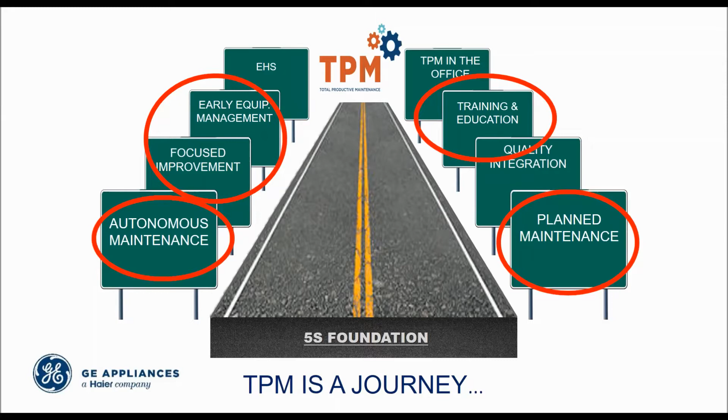And then obviously 5S. 5S is very important. 5S helps with your safety. 5S, you really can't do autonomous maintenance, and planned maintenance is less efficient if you don't have a good 5S foundation.

Okay, so why did we need to go into reliability? Well, we had new ownership, and Haier is a Chinese company. So they gave us a little leeway for the first year, and then the second year, there were some strict KPIs put on us. And so we really needed to get to reliability so that our equipment was more stable.

We have increased competition. Okay, increased competition. There are competitors in Tennessee, competitors in South Carolina, competitors in Ohio. And so we really needed to improve, once again, the stability of our equipment so that we could get our products out the door. We have increased capacity needs. Our sales are just going through the roof. And so we really needed to improve our manufacturing capacity.

All of you probably are having the same problem. Our labor pool is shrinking. We have our older employees retiring, and we are having a difficult time finding the skilled labor that we need to work on the assembly lines in the manufacturing plant. So actually what we've done, we just rolled out a huge workforce development, had a press conference yesterday on partnering with the city of Louisville, with the schools to help with that labor pool.

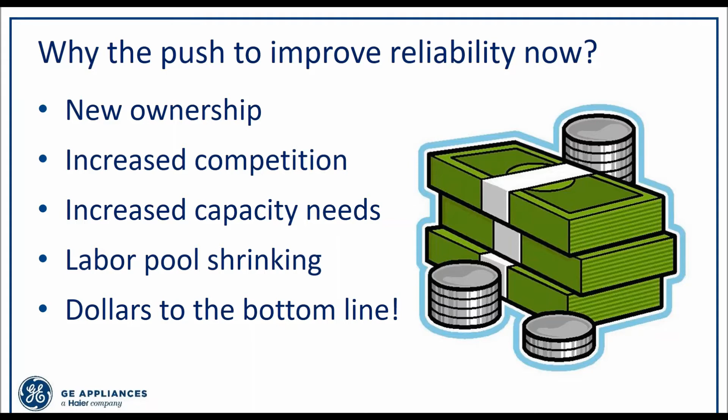And then obviously we want dollars to the bottom line. We're here to make money, if you will. We've all heard different quotes about what insanity is, doing the same thing and thinking you're going to get different results. Well, I found this online. If you change nothing, nothing changes. And so the first thing that we had to do is we had to go in and we had to change the way we were doing business.

Now, in order to do that, you have to be very aware of personal feelings of employees. You can't come in there and say, well, you're doing this all wrong, so you have to do it this way. So what we had to do is we had to get some data. We had to show people that there are better ways of doing things. And what's in it for them? Why do they want to follow these changes that we're going to ask them to participate in?

And so we really started almost like a marketing campaign with data and helping them understand what was in it for them to do this. Okay? Cherney and I were talking about this earlier in the week. I did this presentation and used this slide a year ago.

And the first part of this slide, we are reactive. I didn't have "but getting better" on that slide a year ago. So we are still reactive, but we are improving because of the reliability strategies that we have implemented here at GE Appliances. Okay? Number one, we've decreased safety risks in our plants. That's one of the most important pillars in TPM. And if you're implementing TPM and safety isn't your most important pillar, there's a problem. Okay? Because you want your employees going home the same way that they came into work.

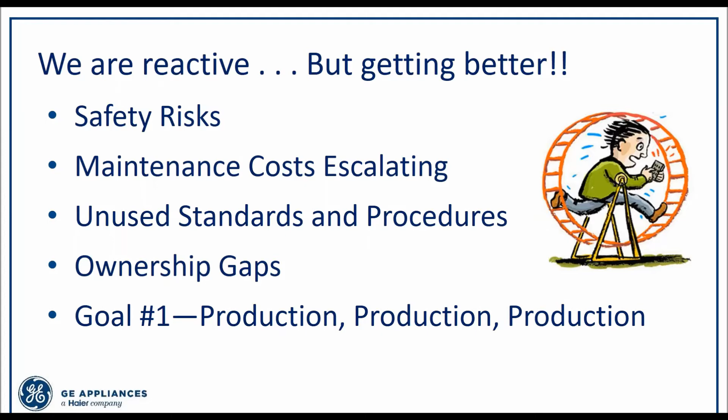And then I'm sure all of you in manufacturing have this same problem. The goal, production, production, production, is the most important. So what does that do? Well, that means your maintenance guys can't get in and do their PMs. That means that if you break down, my guys, you better get it back up because we got to produce. You can't shut down your equipment to restore it or have the operators inspect it. So we really had to change the thought process of our operations team to realize that reliability and TPM can be a partner with this goal, production, production, production. Okay, so I'm pleased as I can be that I can put in, we're getting better, and we really are.

So what did we decide to do? We picked the low-hanging fruit. And one of the things that I know from my previous lifetime at Nissan and at ArcelorMittal Steel, lubrication is a low-hanging fruit. And it actually is the lifeblood of the equipment. And people really don't have the understanding about lubrication. And so this is where I decided that I was going to focus. And I will tell you, it was a learning experience for our plants.

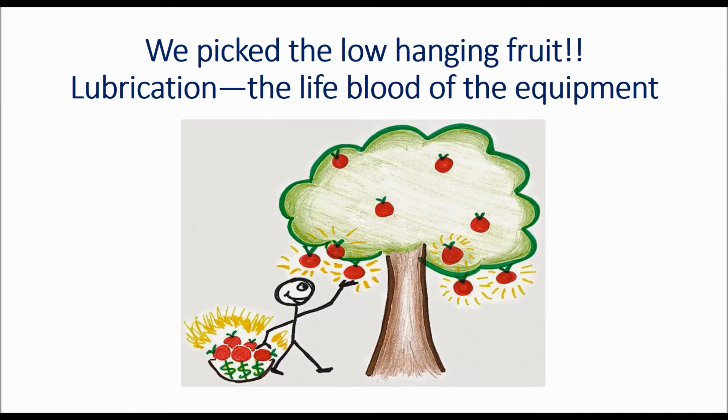And we are doing very well now. Remember, I've only been here 2.5 years. We started our journey in lubrication in the end of December 2016. And I'm going to show you some results that I think will be very helpful to you. While I will say this, it's not the easiest thing in the world to do, but there is low-hanging fruit.

Okay, so I'd love to poll you on this, but I'm sure you can think, here's what most of us are up against. Oil is oil and grease is grease. And it really doesn't matter. Oil, who cares what kind of oil we put into the equipment? And also, we couldn't find the blue grease, so we used the red grease instead. Or when we're greasing, once it comes out of the bearings, boy, we know, okay, we've got enough grease. Okay? So we really had to shift and change culture by understanding that oil is not just oil and grease is not just grease. Okay, and so that was a huge learning curve for all of us here at GE Appliances.

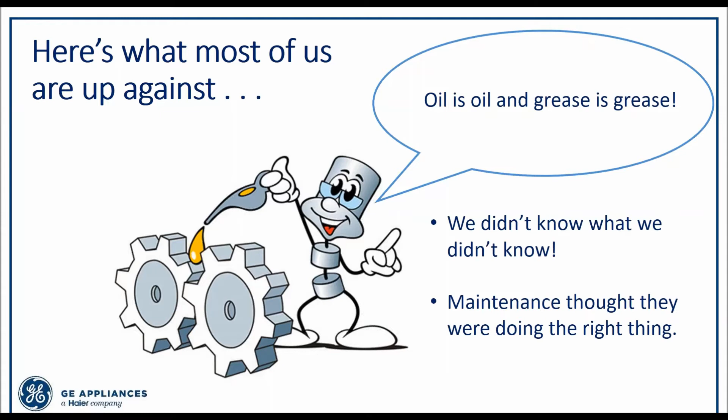Okay. Whoops. Okay, we have another poll question. So the question is, sorry, I can't see my screen, what category of precision lubrication assessment do you think GE Appliances scored the lowest in? So they actually had a company come out and do this assessment. And so if y'all would go ahead and take a vote, we'll see if you can guess correctly. We'll give them a few seconds. Okay.

Okay. Just about everybody has voted. I'm up to about 90%. So I'm going to go ahead and close this, and I'll share the answers. So it looks like 60% chose training and education, and the next one down was lubrication, storage, and handling. And then the lowest votes were 10% to equipment maintainability and contamination control, and then oil sampling best practices.

So is that kind of in line with what you experienced, Mary Jo, with GE Appliances in your assessment? You guys, those 60%, you guys are really smart. So I know that you're not getting a prize today, but you've got pride. Okay, we'll give you pride because you're correct on that. This is our actual baseline assessment. Now, let me explain this a little bit.

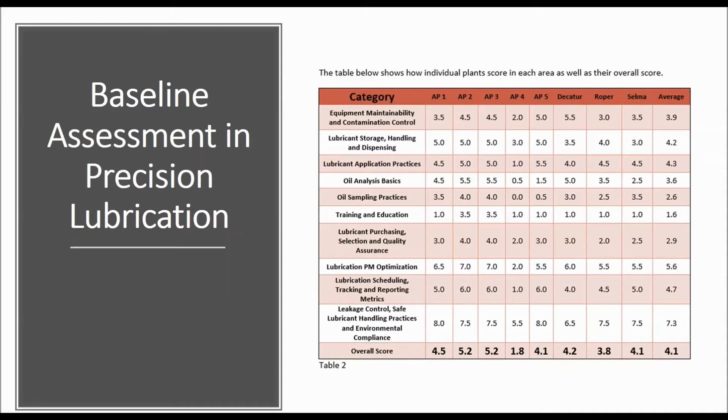So we started with what are we going to do? How are we going to attack this? So basically what we did, we looked at the lowest scores, and we started there. Okay, so here's what we ended up doing. So for the vice president and the plant managers, we had a 4-hour overview training.

Okay. Now, the other thing that I want to talk to you about on this particular level, the vice president has required all his plant managers to go to what we call a lean immersion training. So the plant managers are pulled out of their jobs for 4 weeks. They are put online and actually running the jobs for 2 weeks. They do a one-on-one problem solving for a week. And then they do 1 week of TPM immersion, which is coming up in November for them.

So not only have they gone through this lubrication training, but they're going to get lubrication training again by me in what's actually a 4.5-day training. So we will talk about reliability, we will talk about lubrication. They're actually going to have to get on a piece of equipment and restore it and inspect it. And so this is mandatory from the vice president. They cannot get out of this. So the support at the vice president's level is unbelievable here at GE Appliances.

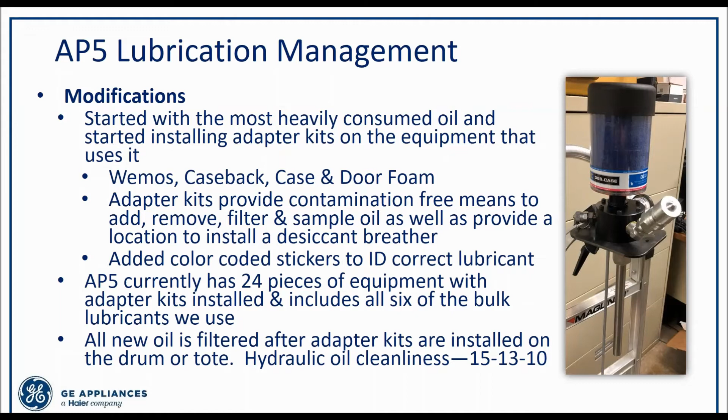We have expanded since this slide was completed, and we are actually prototyping smart breathers that have a sensor in them that help monitor humidity levels in those particular hydraulic units. It's actually wireless, so we go around and take the readings and it goes onto a laptop, or it can go onto a desktop. They've been rolled out on a small basis, but this company will be rolling those out. So we've seen great progress in that implementation also. We're pretty much into the high technology that we want to.

Now, major plastics. So here in Louisville, we supply most of our plastic parts for all of our products that are manufactured here in the Louisville plants.

So one of our major plastic operations managers, once again, took this on because in his area there were lots of leaks, there were safety hazards, it was a dirty area to work in, and so he said, enough is enough. We're going to start cleaning up our leaks.

And so the first place he started is with one of our vendors, and they identified all of the hoses. So each hydraulic hose has a number that when they order it, the manufacturer knows exactly what the fitting size is, how long the hose is, and we get that hose within an hour of calling this particular supplier if we have a leak. He also standardized core interfaces.

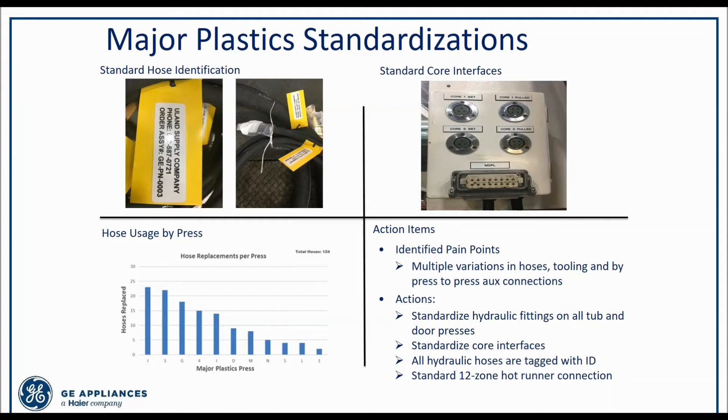He looked at which presses we were using the most hoses in, and so they started looking at why are we blowing hoses and what's going on here. He cleaned up leaks, and I want to talk to you a little bit about cleaning up the leaks. So he has actually changed the culture in this particular department. He started with the maintenance team, and he said leaks are non-negotiable. We cannot have leaks.

So what he did is he started identifying the leaks, and every single Monday morning, he and the maintenance team, now this is the operations manager, looked at what the leaks were, what the consumption of the oil was, and if you look, you can see the downward trend, and this is simply by having leak detection. Okay? This particular area is well into the $100,000 of cost savings due to doing nothing but repairing leaks.

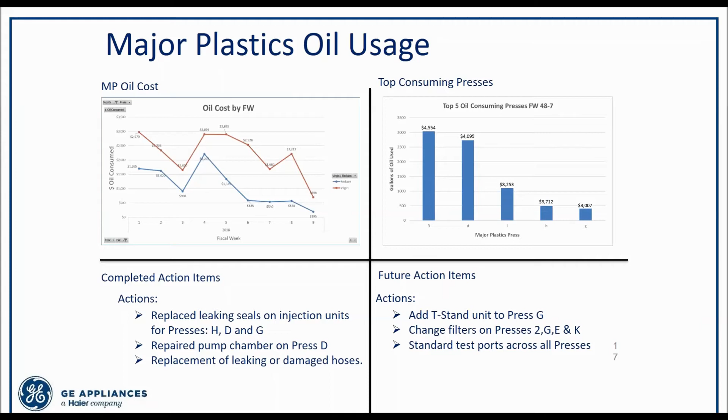So, unbelievable. He presented this particular slide to our plant manager and our vice president. And the vice president looked at everybody and said, why aren't we doing this all over the plant? Why aren't we doing this at every plant if we have this kind of cost savings? So once again, low-hanging fruit. Hopefully you can do that.

Now, AP1 is another plant, and AP4 is our major plastic production plant. So AP3 did the leak reduction first. They're all part of this same major plastics department. So it went into AP1 and AP4, and they just started with reducing and fixing leaks. So there was a 20% reduction just starting it this year in oil consumption in AP1, and a 71% reduction in AP4 from last year by simply fixing oil leaks.

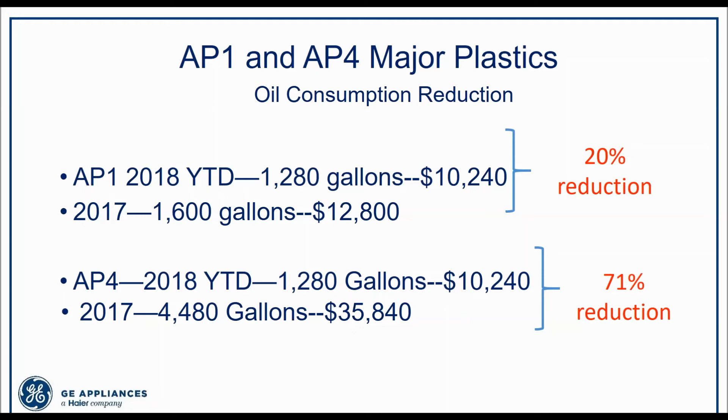So the money is there, and actually the vice president said, show me the money. So I'm starting to show him the money. Okay, very important. AP1, this is our laundry plant, and I wanted to show you, we've set up in all of our plants oil storage facilities. So we have an oil room, it's clean, it has temperature control. If you notice, we have color coding there. And we're requiring all of our plants to set up oil rooms in this manner, and all of our 8 plants have started doing this.

One of our consultants that we used gave us the design of how it should be set up, and it was free. So once again, we took advantage. Okay, how is a good oil room set up? What's the best practice? They drew it up for us, and we just followed their drawing.

If you notice, we have filter carts, and this particular filter cart on the right, if you can see my mouse, is one we purchased. This is our mobile filter cart, and our maintenance guys love it because it's easy to move the oil and to fill. And we have quick disconnects, we have cleanliness, so it's contamination free from the time it's filtered till the time it's added into the piece of equipment. Now remember, AP5 was the one I talked to you about earlier. This is another plant in Louisville, and AP1's doing the same thing.

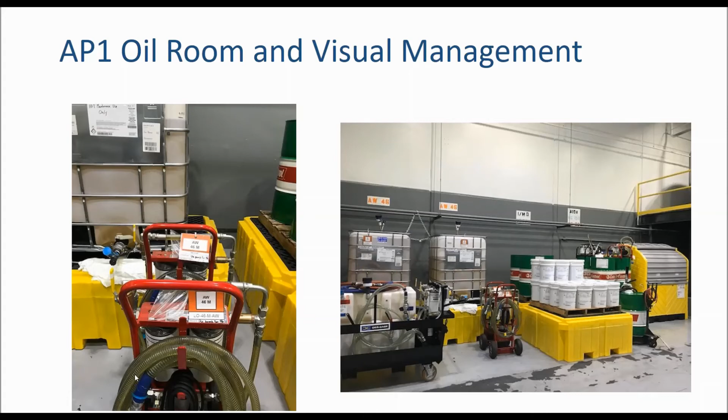The other thing that we did is we used visual management and labeling to avoid mistakes. So here are our numbers, the HPU filter, and that is our purchasing number, the 72317. We put that on every single one of our hydraulic units in AP1, and we're moving that throughout the plants so that our maintenance guys will never make a mistake using the proper filters. And this was a maintenance predictive technician who decided to do this. He took it upon himself: I'm going to label all these so nobody makes a mistake. So we're seeing the culture change.

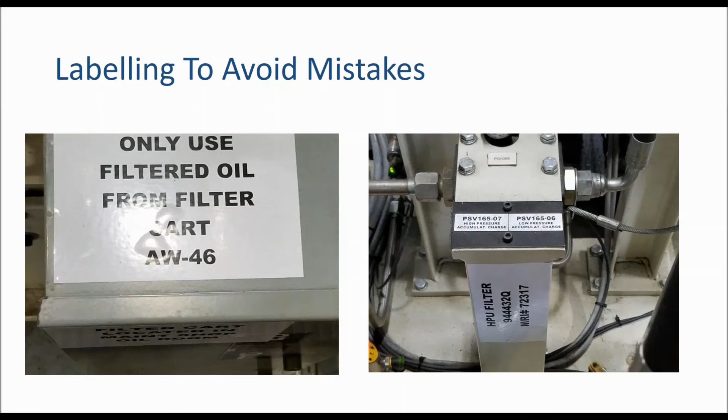Okay, if any of you are familiar with RCM or reliability-centered maintenance, this is the PF curve. And once again, on the PF curve, once you implement equipment, failure begins. Okay, so what we decided is we needed to be proactive and monitor our oil condition and our contamination. We take oil samples on every single one of our critical equipment, and what we've done is we've started monthly in most of our plants.

Some of our plants, because we had baselines before, we've gone to quarterly, but we monitor our oil, and we've actually gone to condition-based oil changes in most of our plants. So we look at our oil analysis and the trend on those oil analysis reports, and that's when we change oil. Let me give you an example of that.

In AP5, we had a WEMO, which is one of our most critical pieces of equipment, and we had the WEMO people in doing some repairs that they needed to do. They come in once a year and they look over the machine and inspect it, whatever. And so the WEMO gentleman said to the reliability engineer in that plant, okay, it's time for you to change the oil now. We're done with our assessment.

Well, the reliability engineer had his laptop and he pulled up our oil analysis and he said, I don't need to change the oil. This oil is still in good condition. I just tested it last week. And so if it would have been a time-based oil change, it would have cost us $6,000 at that point in time. And we really didn't need to change the oil. Okay, so that's one of the things. It tells you the health of your oil.

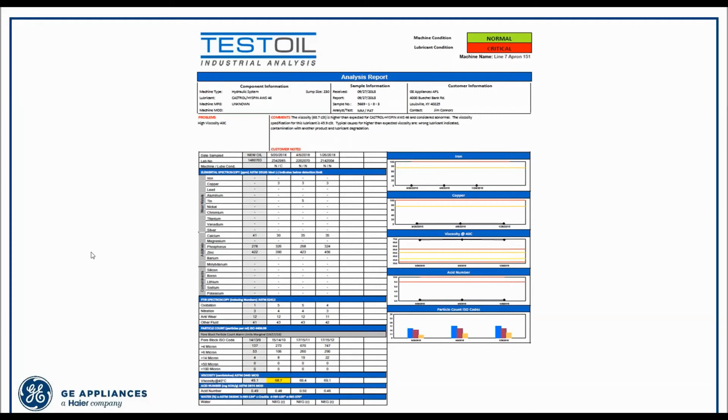And on one of our critical processes, there was so much contamination before we started this, we had to change the oil every week, every single week. Now we don't have to change the oil on actually a yearly basis, because we've gone to the T-stands with kidney loop systems, and we're using oil analysis.

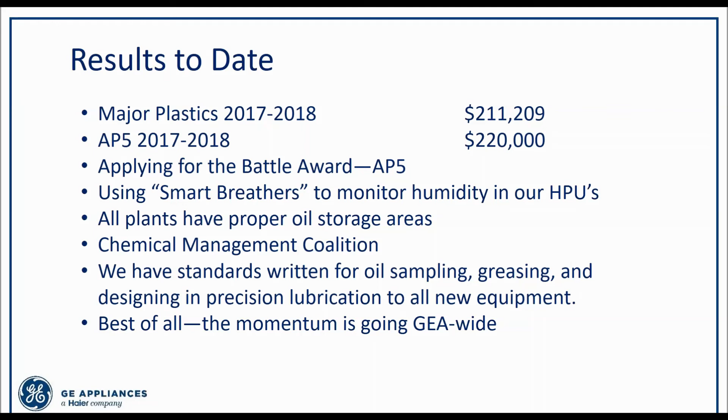I do have a couple that were submitted, but first, thank you so much for sharing this information with us. I know everything you talked about is going to be very useful for someone starting out, trying to implement a corporate-wide reliability program. I've gotten the sense from recent trade shows and talking to customers that it's a huge undertaking, but it's also becoming more common for companies to set this standard up corporate-wide. I applaud your efforts, and I can't wait to check in with you maybe a year from now to see how things have gotten even better.

For the audience, Carrie's got my contact information. If you're going to start this journey, please get it from her, because a peer I used to work with said, people smarter than us have already done this, so shamelessly steal. I'm saying that because I've made mistakes and I know what they are, so I can give you advice so you don't make the same mistakes I've made. Absolutely get my contact information from Carrie, and I'll get back to you as soon as I possibly can.